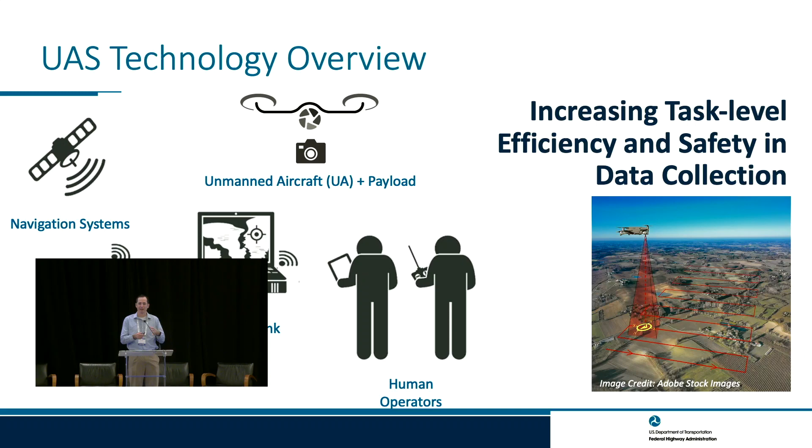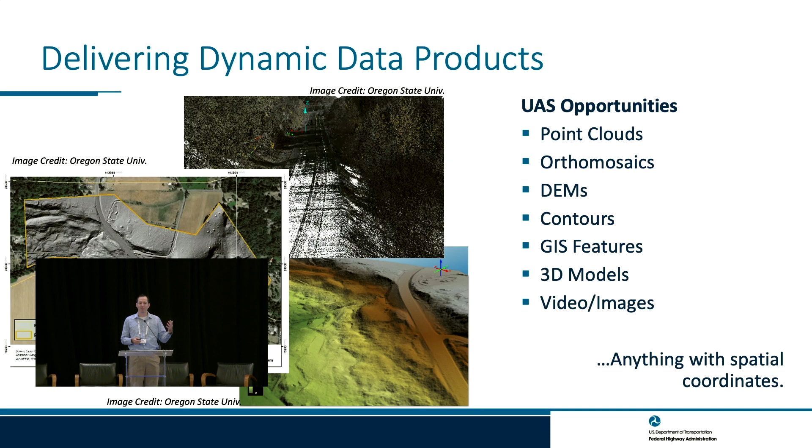This presentation will ramp up in complexity, but I want to set the foundational stuff on what we're looking at, which is the data products. There are a lot of data products. Most of the states have been out there talking about that yesterday, so I won't belabor it, but these are all the things we can do today. They're pretty straightforward, but a picture is worth 1,000 words. Let's show people what we're going to do, and there's a lot of buy-in when you can have these high-quality visuals.

Some of the other areas we're looking at are traditional inspections versus UAS inspections. There's kind of the assumption that the status quo is perfect, right? We always fight the status quo inertia. Everything that's out there, since it's what's being done, is somehow good, and anything different has to prove itself at a higher level than justifying the status quo, because the status quo is what we're doing, so it must be okay. But where are those areas we can start looking at?

Again, we're not replacing bridge inspectors, we'll never replace bridge inspectors. But how many states have enough bridge inspectors to handle all their inspections and make sure all their inspectors have spent the time on each bridge they're comfortable with for their inspection? Pretty sure we all want a little bit more efficiency. It's not like there are thousands of people beating down the doors of the DOT to go be bridge inspectors, the workforce is pretty tight in that space. So how can we make them more efficient and spend their time on those critical elements where we really need them to get their hands on and do the detailed analysis?

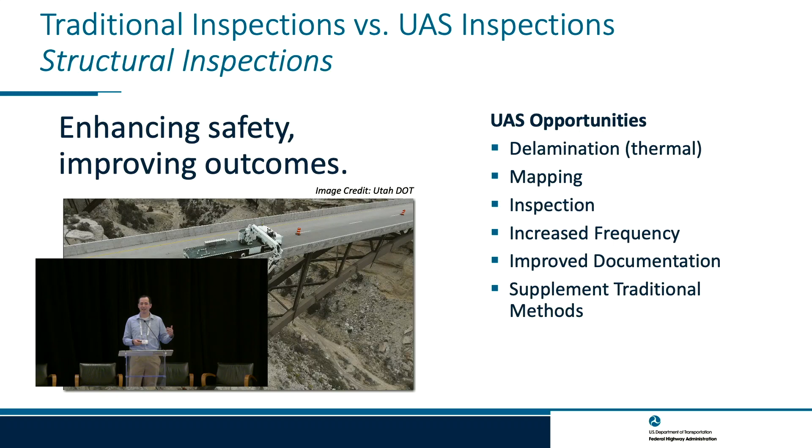Looking at construction inspection, a lot of construction inspection is routine visual inspection, simple documentation, the type of stuff UAS really excels at. Sure, you still have to have concrete technicians out there, you have to do asphalt testing, things like that. UAS is not going to replace that, but the things you just have to go look at and make sure the contractor has done, maybe progress quantities, maybe not final quantities, but progress quantities.

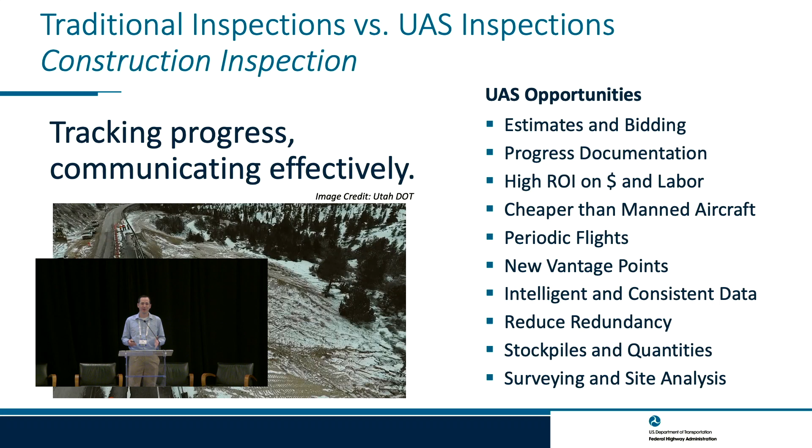Those are things where your inspection staff are burning up a lot of time. How many of you have inspectors who are fully engaged on every single project happening in the state? I'll say the answer is zero. Your inspectors are triaging where they need to be, trying to figure out the highest risk areas, and the rest they just can't get to. So this can really help your inspectors be more efficient.

Emergency response is another use case. The UAS is great for situational awareness, getting out to these high-risk areas where we know they're high risk because it's a declared emergency area. Why do we want to start putting people there just to try to get an idea?

But you can start planning your response, from a DOT perspective, looking at where the roads are washed out and getting rough quantities. Is it 100,000 cubic yards of material that came down on the road, or is it 10,000? We don't need to be super precise, but I need to start planning how long it's going to take to reopen the road, because people will ask how much equipment it will take, what's a rough order of magnitude cost, so we can start budgeting and getting a reasonable idea of what it'll take to come back from these emergencies.

Through Every Day Counts, we've identified 15 use cases. Probably readable in the back of the room depending on how good your eyes are, but these are 15 use cases we think are ready to go today. As you look through your UAS program, if you're doing some of these, these are others you might want to consider as use cases that feed on each other. If you get good at one, you can take those lessons learned and grow your program. These are ones Federal Highway can provide support on, so if you have questions, we can help get things up and running for you.

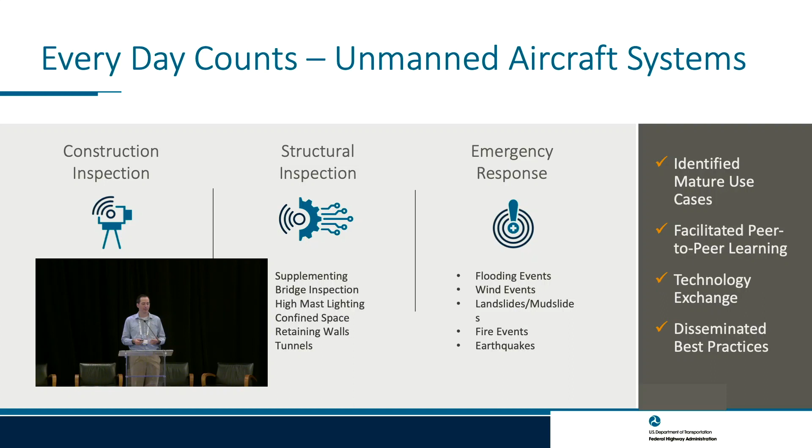So what have we done? In about the last 18 months is when most of those peer exchanges and workshops happened, so it's been a very busy 18 months. Just out of curiosity, how many were part of the almost 2,000 people who were at one of those events? Look at that, we're still getting more people. That shows there's a lot of turnover in this space. We're trying to get to everybody in every state, so we're going to keep going with this.

So this is my announcement that we're going to continue the peer exchanges starting next year, another round of them. We were listening to everybody talk yesterday, and we're going to try to find states with similar levels of programs and similar challenges, and see if we can get 5, 6, 7 states together and do several peer exchanges next year. So if you're interested, talk to me, we can make that happen.

It's our goal to continue this conversation for at least the next two years. I'm not going to try to do this level of engagement every year, but we're going to keep the conversation going.

Again, from what you all have told AASHTO, everybody has a UAS program in some stage of development. My hope is that we can continue to be of value to everybody, because we've heard every state DOT, Puerto Rico and DC as well, say that they want to use UAS. They're invested in moving it forward. So how can we do it with a national plan so we're not reinventing the wheel 52 times?

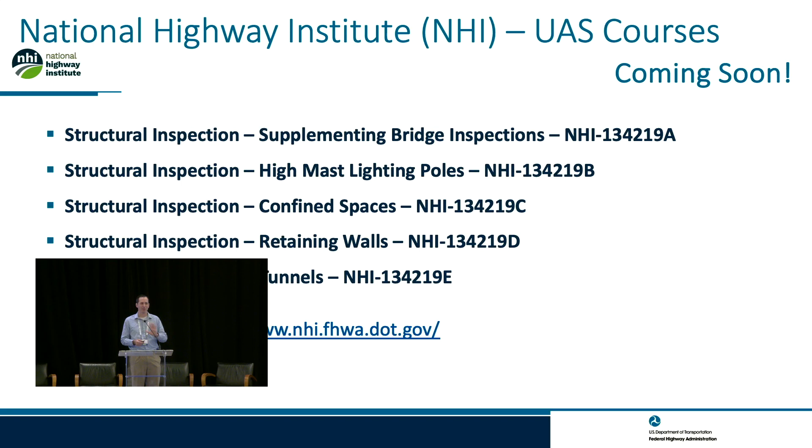Another interesting thing Federal Highway has done is we have that unique opportunity to look globally and see what other countries are doing, see what we can borrow. As we're looking to borrow from states here, we're also looking to other countries to see what they're doing, what their operations look like. Last year we went to the UK and to Germany and met with their UAS program at the federal level, state level, local level, academics, and private sector. We were busy, to say the least, moving around those countries to meet with everybody.

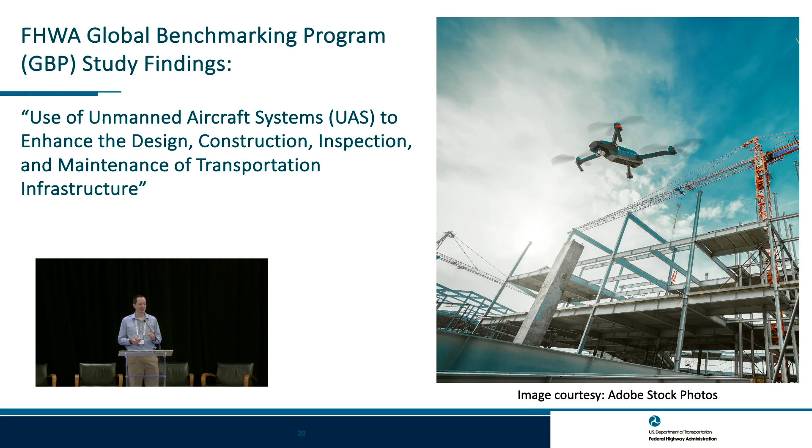So why did we go? Again, we have similar infrastructure around the world, similar responses - there's flooding, fire events, wind events. So what are those things that are common? What are those pain points that other countries have? Perhaps can we collaborate at an international level? So we're not just looking at resources in our country, we're looking more globally at resources to solve these same problems. To the software vendor point, if you get all 52 jurisdictions in the US wanting to solve a problem, that problem probably gets solved. If you get multiple countries wanting to solve the same problem, I'm pretty sure that problem gets solved that way too.

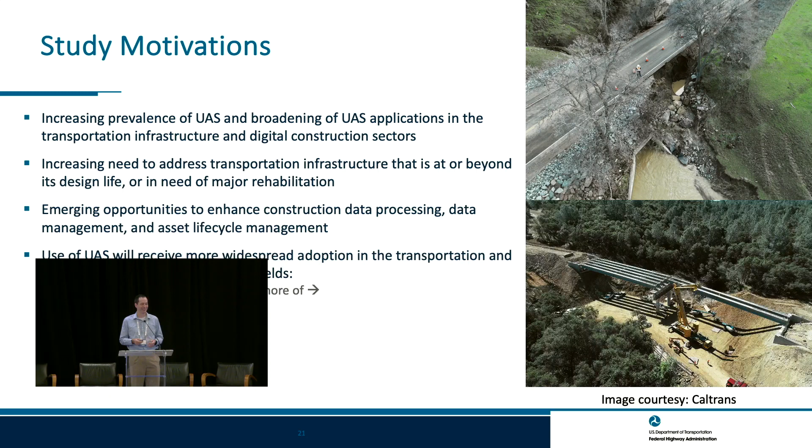So this is just a summary. Again, we were busy, but we also looked at multimodal, so the Port of Hamburg, to look at what other modes of transportation outside the highway sector are doing. Federal Highway is kind of more uniquely positioned to look at all those other modes of transportation, get those lessons learned, figure out where people are having problems or where they've pushed the envelope, and what we can learn. So there's a lot of findings here, and I'll get into these in a little bit more detail.

The findings are that everybody kind of has the same issues and is seeing the same benefits. Confined space inspection is one where I think there's a lot of value, but perhaps the platforms aren't as good as advertised yet, though they're getting there. The safety regulations around confined space inspections make those really expensive to do, whereas if you can do it with a drone with confidence that you're actually getting a good inspection, there's potential for high value there. So we saw a lot of confined space inspection.

Data management was another one. Everybody's struggling with data management. That's a global issue, right? We're not alone, you're not alone, the U.S. is not alone. Everybody's struggling because the ability to generate data is so inexpensive now that everybody's flooding their IT systems with data, everybody's flooding the cloud with data. There's data centers being built everywhere to handle the data that's just being mass produced now.

Looking at machine learning and AI, not as a buzzword but as an actual thing that can help us. Everybody's like, oh, we'll let AI solve this problem for us. It doesn't, until you give it really good training data and spend hours validating it. And I don't want to do that. No state in the US really wants to sit there. If anybody has done machine learning in detail, there's no way some poor undergrad is going to sit there their entire life marking up and annotating pictures.

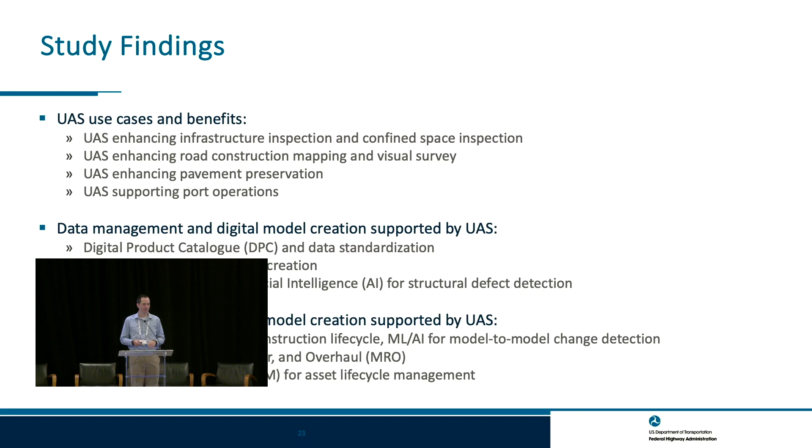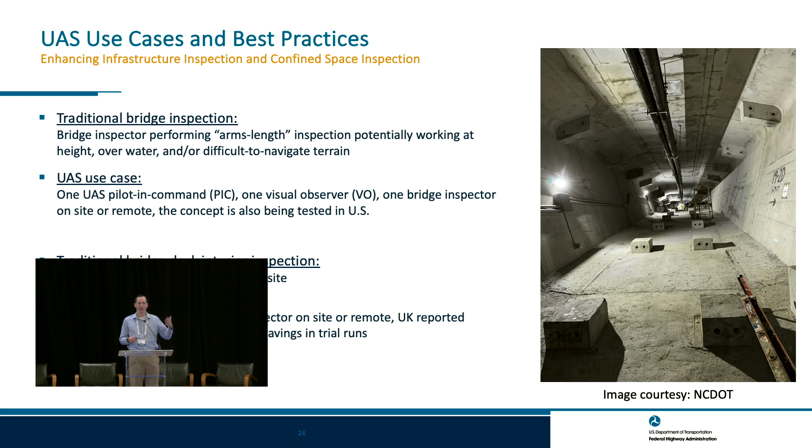suspect there's defects or we don't have good imagery to validate. So yeah, I covered a bunch of the inspection here. The UK, on their confined space inspection within bridges, found about a 50% time saving, and again, they're still in the testing phase. They expect that to get better as they continue to have better performing platforms, better work processing, and kind of plan in the future to put LED lights within some of the confined spaces you're going to inspect on a regular basis, rather than trying to figure out 20 years from now how we're going to light this thing. We've thought through how we're going to inspect things at the design point, or at some maintenance or rehabilitation point.

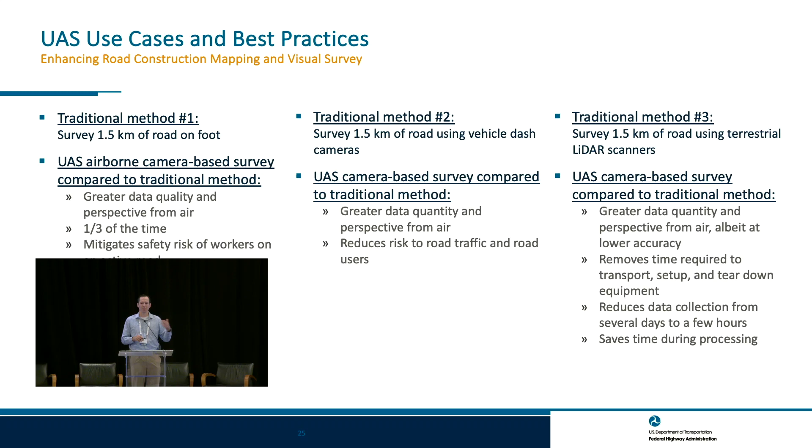Looking through surveying, I thought it was kind of interesting that ground control points are just becoming part of the construction process within the UK. Especially in their high-speed rail areas, all of the bridges already have targets on them, so they don't worry about going and setting a bunch of ground control points. They'll validate it occasionally, but they understand they're just going to have ground control points built into their infrastructure, so they can always tie back and don't have to spend all this time going back and setting ground control points for areas they know they're going to inspect regularly.

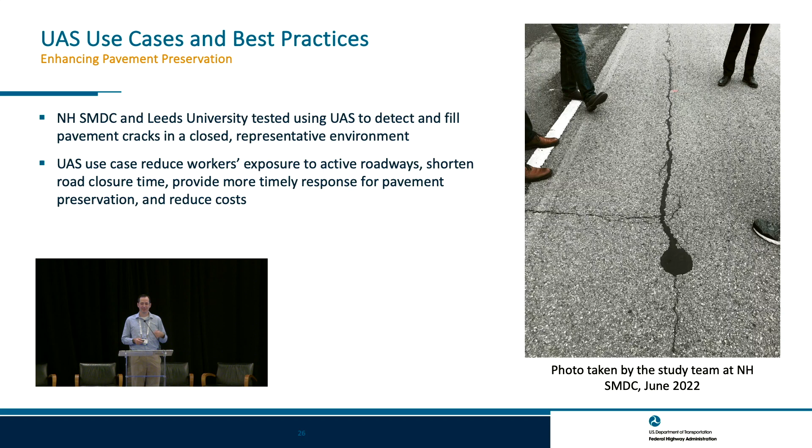Interesting technology - I put it in here just because I think one day this is the super future, right? Where it's crack sealing - it's detecting the crack and sealing the crack all from a drone. So it's a drone that has a crack sealing capability right on it. The theory is, in the future, have a drone swarm that goes out at night and seals all the cracks when there's no traffic, then just flies back and recharges and reloads during the day. And it worked in theory with one drone. Now the swarm technology and the ability to do this on some of our really bad pavements isn't there yet, but again, it's starting to get outside the box of our asset management plans.

So the Port of Hamburg was very interesting because of the German regulations. If anybody complains about the FAA—and I've got the FAA covered here because they're coming up next—go to Germany and try to fly a UAS. I promise you'll come back and say, oh man, the FAA is the best.

But the Port of Hamburg said, well, the economic imperative makes sense that we can waive some of this and start doing remote operations. So they started looking at the big gantry cranes that are unloading their ships. Taking those out of service to do a detailed inspection on the gantry crane is a huge economic impact. It's a controlled space anyway, so let's go fly a drone there autonomously.

Collect the information of the gantry crane while it's working—look for bolts, rust, hydraulic leakage, all that stuff—and then we can look at the imagery and video later. But we're never taking these gantry cranes out of service unless we see a reason to. We're not taking it out of service for routine inspections. I think there's a chance some of the lessons they're learning with those remote gantry crane operations are something we can build on for remote critical infrastructure inspections here in the US.

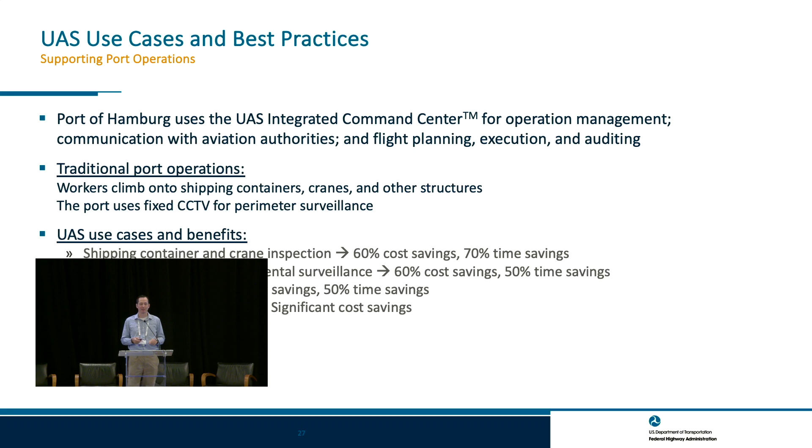The other part is getting into data. How do you manage all the data? How do you collect the data? You're collecting these huge volumes of data. The UK has taken that and said, okay, about 80% of what we do, we just apply our design standards, with an engineer sitting there applying design standards.

We're creating these detailed sets of plans for a 1.5 mill and overlay job, and we're not really changing anything—everything is within our design standards. This is a perfect opportunity to let AI apply the design standard because we have this high quality, wide breadth of data collected through the UAS.

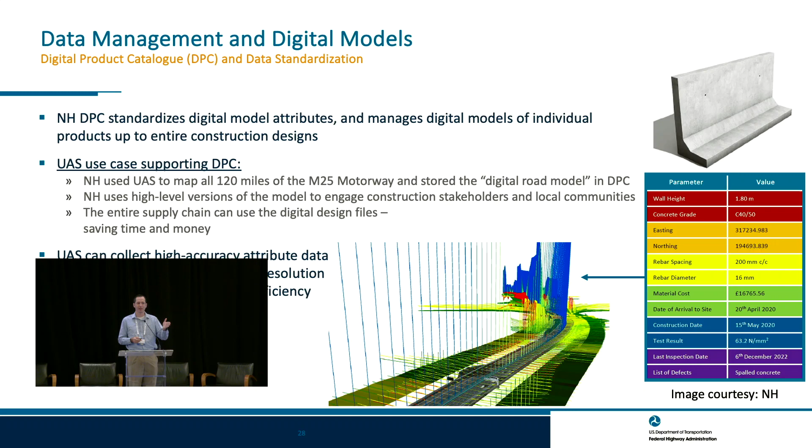So it's working. The red areas are where the AI says your engineers need to go deal with this because the design standard can't fit. The green areas are where it has confidence the design standards were applied. So the UAS lets you collect wide enough data where you're not looking at line work where it's hard to understand what's happening outside the survey points.

And this is again getting into just setting ground control and having it permanently be a part of it. Like they have a major crack in the bridge—let's just set ground control there, and then we can fly it and not go out and try to set ground control every single time.

So it's something to learn. If you're going to come back to a site time and time again, just set the ground control the first time, something that's going to be a little more durable, where you can just get back to it and not have to keep resetting it.

And that's also for tracking crack spread and things of that nature. There are other ground control points that are not on something that's moving, so they can tie those in and see if that crack is moving and they need to get in there immediately, or it's stable and they can just let that bridge be.

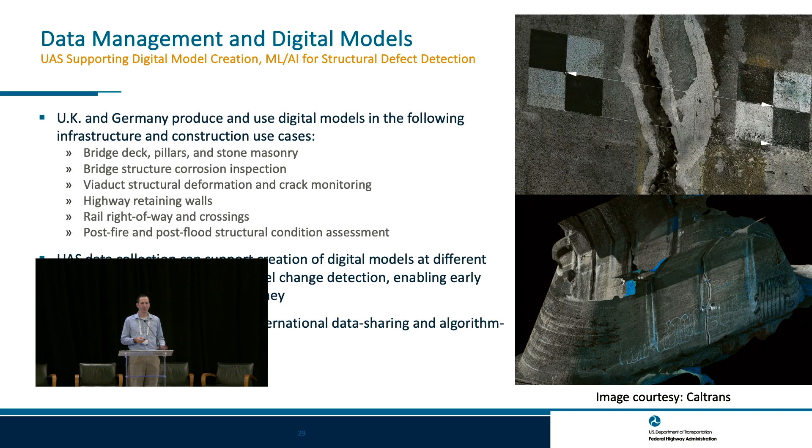Something that's interesting—we're actually putting an NCHRP proposal together. So if this interests you, talk to me. Aaron, is Aaron in the room? Is Thomas in the room? Is Zeke in the room? There's Zeke, I got one of the people who were with me in the room. Talk to one of us.

What they've done in Germany is looked at—okay, we don't really have good maintenance plans for UAS. We just kind of look at it and say it looks all right, the battery's more or less holding the charge like we think it should, let's go fly. I'm assuming that's probably what most people's maintenance plans look like. Some might be more advanced, but we're trying to look at how we can standardize a maintenance plan.

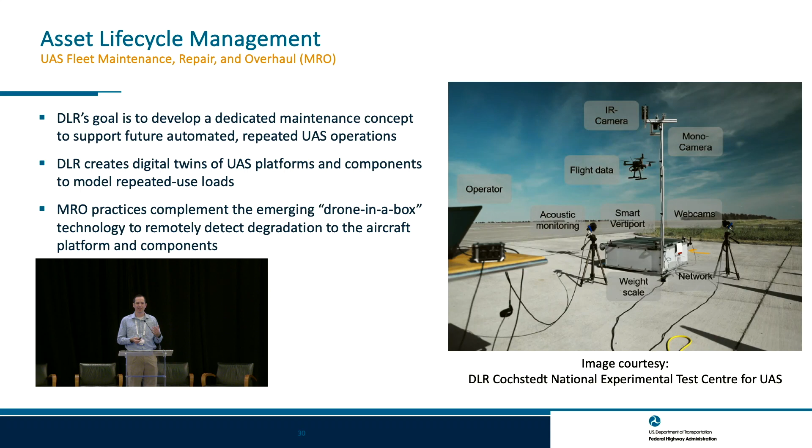This is overkill because this was like the German equivalent of NASA. So they set up all these sensors, creating a profile for the platform. What they found is that it sounds different when you start to have micro cracks in your propellers, imperceptible to the human ear, but the computer can tell the pitch is different. So if you have a microphone, you power up your UAS, and the computer can tell you right away there's cracks in your propellers you can't see yet, because it makes a different pitch when you start it up. So how do we create things like that so we can have more proven safety cases?

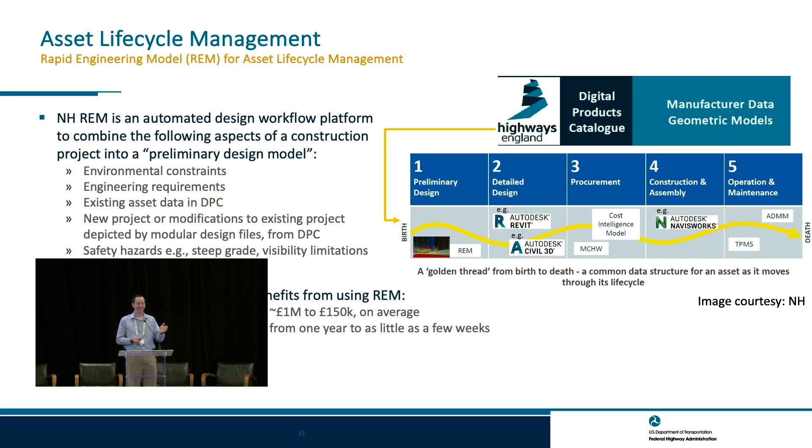This gets into more of the automated data management and design work. I'm not going to spend a lot of time here, but just to let people know, at almost every workshop and peer exchange we did in the last 18 months, we started with UAS, and by the end of day 2, we were all talking data management. I think that's where we ended up yesterday too. Internationally, same thing - we spent all week talking UAS, and the last day we spent the whole day talking data management and how we're going to handle this.

So we're looking at taking these lessons, bringing them back domestically, looking at an NCHRP proposal to develop common maintenance standards, because there are already NCHRP projects in the works to put training plans together and organizational structure. Those projects are in the works, not published yet. But there's nothing on maintenance of the platforms themselves, so it could be a good opportunity if you're interested in being on the panel and reviewing it to make sure it makes sense. I don't like publications that don't make sense to practical users.

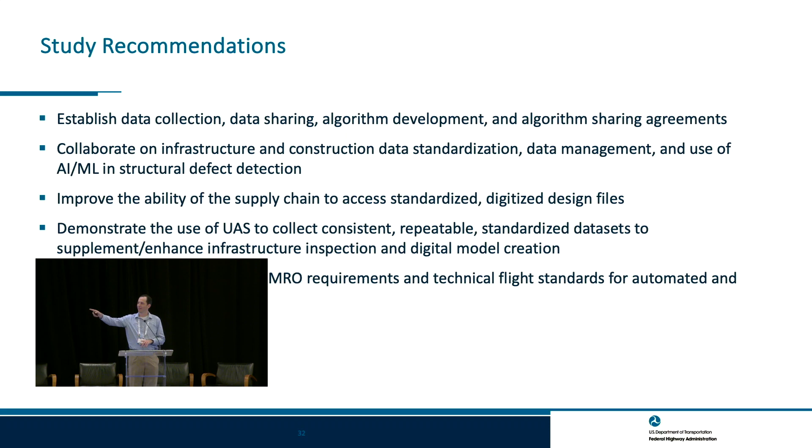Again, talk to me, and Zeke's over there. He's right there. You can talk to him too.

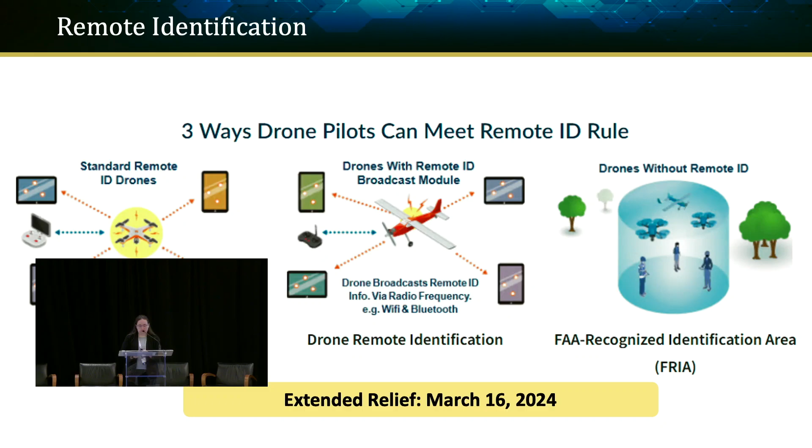I just wanted to end by saying my background is in community planning, so all of this has been really fun to learn and go back to the GIS type things. And y'all are doing amazing things with UAS that I at the FAA didn't know, so it's really awesome, and I only hope to work with you more going forward. So if you have questions, if you have policy that just doesn't make sense because it can be confusing, reach out, we're here to help. So that's everything I have.

I think I have time for questions. Yeah, so if anyone has one, let me know. No, I couldn't hear that.

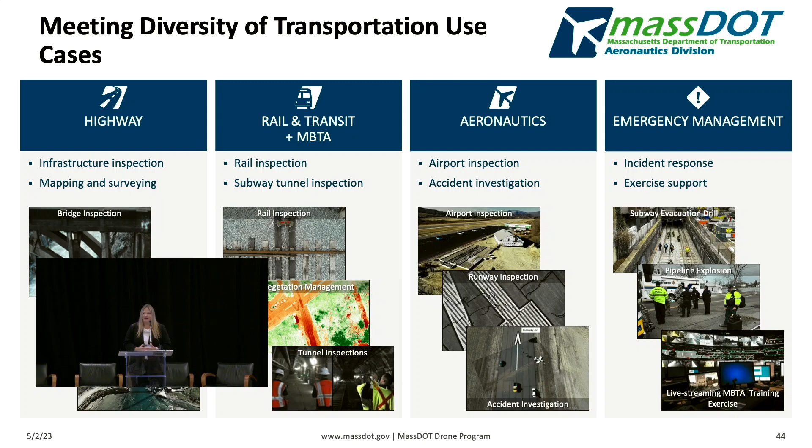I already mentioned some of the use cases. Today I'm really going to concentrate more on some of the rotary studies we've done, and maybe mention a little bit about the intersection studies.

I see Transoft is in the room. They were part of an intersection study we did with the MassDOT safety section, so good to see you. And I realize I'm using the word rotary. I think to the rest of the world, roundabout should be the right word, just so we're all speaking the right language.

We have done a lot of data collection around rotary or roundabout studies, with the safety section, MassDOT Highway Safety, as well as the Office of Transportation and Planning. I'm going to talk about just a few specific use cases that we did.

So the first is Albert J. Brown Circle. This is in Revere, Massachusetts, and it is a doozy. I didn't know too much about it, but you can see there's not a lot of lines, not a lot of organization that goes into this rotary. What's happened is they've had not only a lot of traffic incidents, but also a lot of truck rollovers. And I think the straw that broke the camel's back — if you look in the top left quadrant, there's a salt marsh there, and it's a really vital salt marsh. There was a truck rollover, there was hazardous material, and it infiltrated the salt marsh.

So the Executive Office of Environmental Affairs Secretariat called the Secretary of Transportation and said, could you please do something about this rotary? They wanted to make some really good decisions about it, so they asked us if we could fly, and that would be one of the data components they would use to try to make good decisions on what they could do to enhance the safety around this rotary.

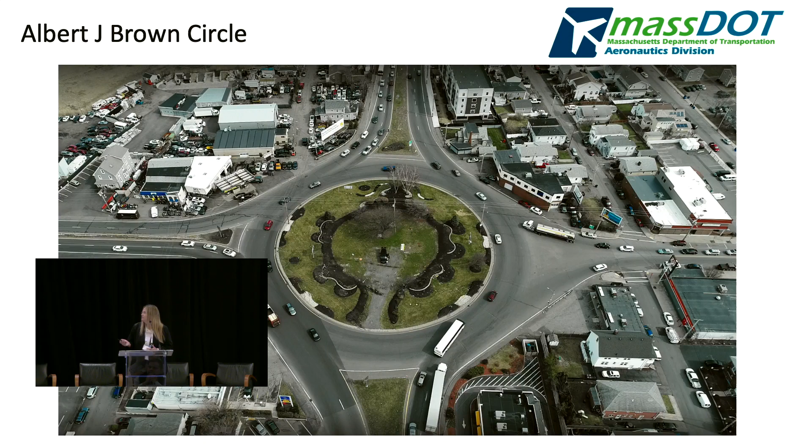So it's funny, once I found out about this rotary, I started to see all the incidents on social media, so that was kind of an interesting time for me. And the one you can see there on the right, the next time we went to do our flights, because we did this over a series of a few weeks, that rotary sign was actually down on the ground, one car took it out. So it's a very interesting predicament here.

All right, so once they asked us to do these flights, it always figures that the worst traffic locations are closest to Logan. So most of the Boston area is under Class B airspace. We have somebody that does airspace authorizations and they spend a lot of their time doing that. We have over 40 to 50 authorizations running at any given time. This one was extra fun because it's less than a mile from runway 22 at Logan. So obviously getting out ahead of that and starting the airspace authorization as soon as anybody even uttered this word was really important.

The second issue was, well, if we go out and collect all this data, and even James alluded to it, how are you going to analyze all this? What is it all going to mean? So we brought that up to Highway Safety.

They actually found this company called DataFromSky, and they do a lot of AI machine learning around traffic modeling. You can see this is directly from their website, and they're able to give certain information about what's happening in the rotary. I am not advocating for one company or another, I will just say the instructions they put on their website were great. It was like, this is the field of view you need, this is the resolution you need, and it was like clockwork. We didn't really even need to ask any more questions, they provided all that information.

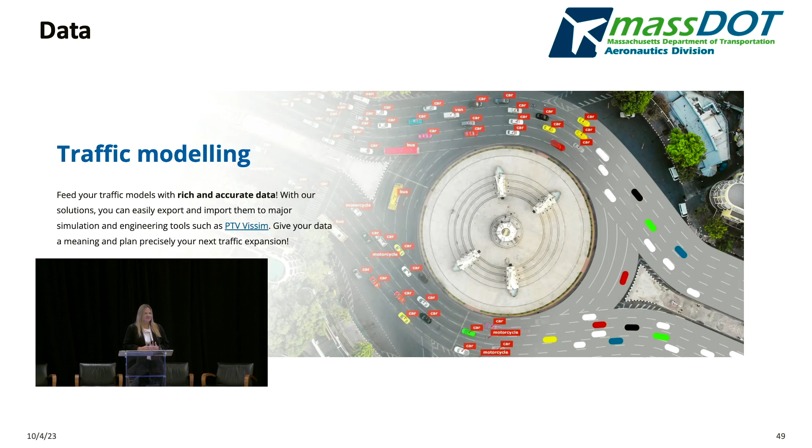So there were a lot of lessons learned for us to go out and collect this much data. I think a lot of us in the UAS community were like, yes, we're going to go out and use 4K and produce the most beautiful video ever. But if you go out and fly it in 4K, you're going to have a large amount of data. So figuring out the very minimum resolution we needed for DataFromSky to do what they needed to do was really important.

The other thing was that they wanted continuous data. In order to do that, as we all know, most batteries only last 30 to 40 minutes, and they wanted 2 hours of continuous data. They asked us if we could put the tether up. We have a tether, I have a lot of PTSD from that tether. There's probably better products on the market today, I don't know what they are, but if anybody wants to know what not to use, come see me afterwards. So we really didn't want to use the tether, especially in a large population space like this.

Luckily, we couldn't get the field of view we needed with the tether, so we were trying to come up with different ideas. We thought about putting up one drone as the other one's coming down, and after working with Highway, they said, you know what, we'll take the 2 minutes it takes for you all to change the battery and put it back up. So that ended up being the solution. There's some limitations with it, they didn't get the continuous data they wanted, but it is what it is at this point.

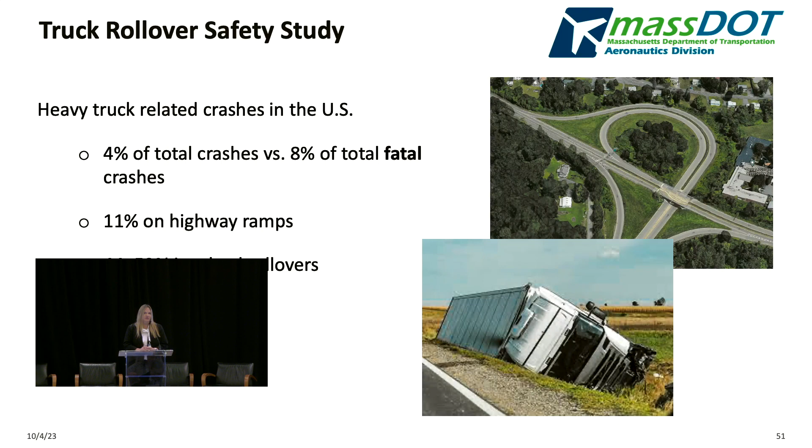So they looked at a lot of different data to determine why trucks were rolling over on these ramps, and they wanted to have some really good data on that so they can make better decisions on what the mitigation would be in the future.

Enter us. We went out and we collected, again, hours and hours of data. They asked again if we could use the tether. The field of view was not correct with the tether, so we did the up and down technique.

Again, this was just one of the data pieces to understand what some of the characteristics were of the trucks that were entering some of these off-ramps.

The ultimate study included some of the characteristics that they were able to get from our footage. They also used historical data, sensors on trucks, and ground sensors to come to these conclusions.

Probably not a big surprise, a lot of it was attributable to speeding, but again, they wanted to be able to get that data to support that. A lot of it was due to unknown reasons—I'm not sure why that was. But knowing that, our safety section could go out and make better recommendations on how to mitigate some of these incidents on our off-ramps on the Mass Pike.

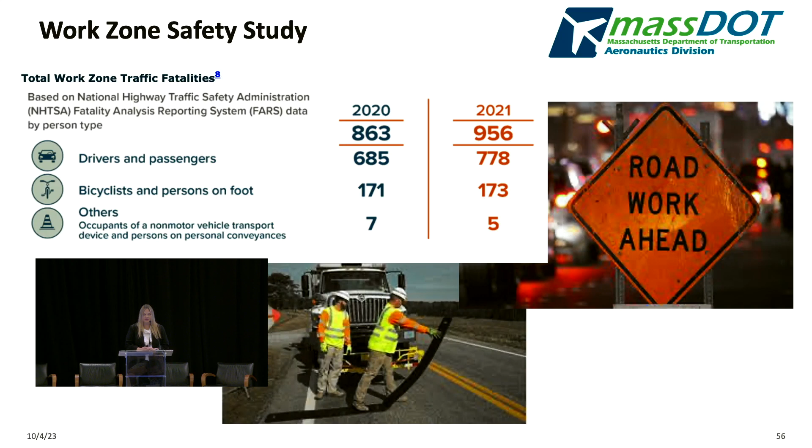So these are some of the pictures that we took from here. This is something we collected just a few weeks ago, so I don't have any data results from this yet, but just wanted to show how drones could go out and help collect data around using different configurations around work zones, looking at some of the rumble strips to see what is causing drivers to slow down a little bit more around the work zones. Hopefully UMass Transportation Center will have these results shortly.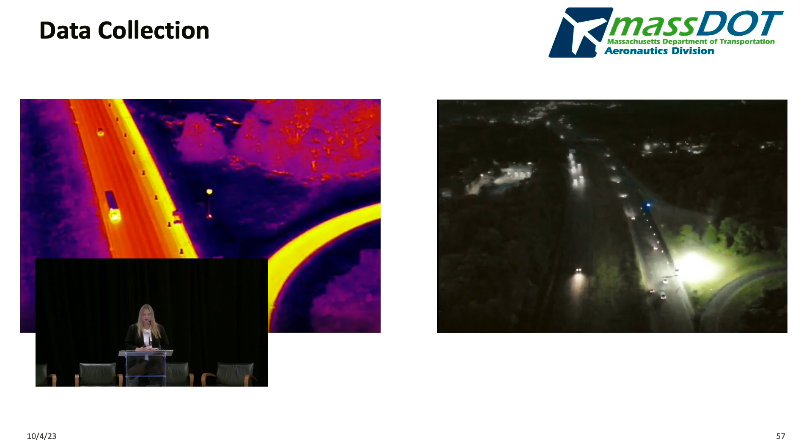We really wanted to try to make some of this public, and that's when legal got involved and reminded us you have to be very careful what you say. So there's nothing publicized yet, but I think it's the beginning of a workflow, working with the proper authorities to eventually get some of this out to the public when we think about public engagement and how we're making things safer around everybody's communities.

And then I thought I'd end on a good note. I saw one of them out here. If anybody's familiar with HAWK signals, they started installing them in Massachusetts, and it's a way to help manage crosswalks and how people cross. I'll show you the video. They came to us and said it'd be really great if we could use a drone to do that, so we could get this out to the public and give them a different viewpoint, and hopefully people would start to use these in a safe manner. Anytime you change any of the traffic configurations, it's always a little bit anarchic. So I just wanted to end with this video.

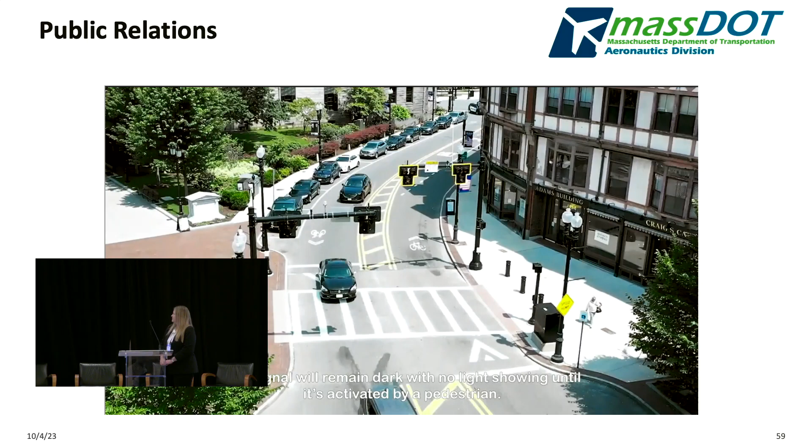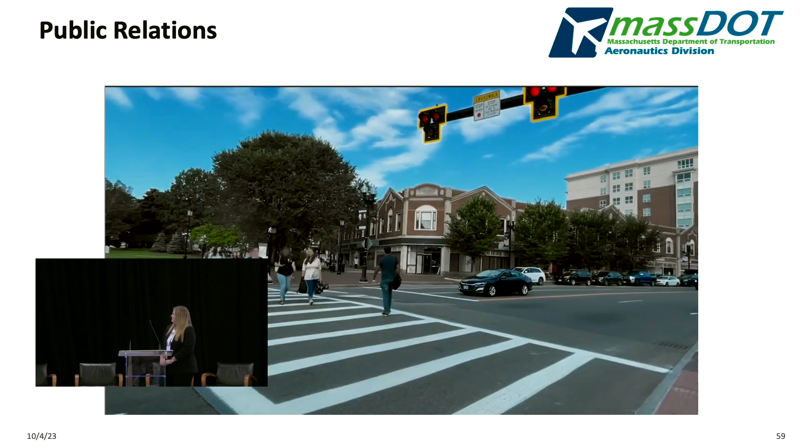You may have seen some of these pedestrian-activated signals popping up around Massachusetts. These are called pedestrian hybrid beacons, or PHBs. They are designed to provide safe crossing for pedestrians in high-traffic areas. Here are some simple steps to remember when encountering this signal. The pedestrian hybrid beacon consists of three lights: a yellow light at the bottom and two red lights at the top. The signal will remain dark with no light showing until it's activated by a pedestrian. When the signal is dark, drivers can proceed through the crossing as usual. Pedestrians can activate the signal by pressing the crosswalk button. Once activated, drivers will see a flashing yellow light. Drivers can still proceed through the crossing but should use caution as a pedestrian is waiting to cross. The signal then turns solid yellow, alerting drivers to prepare to stop. The yellow light is followed by solid red lights. Drivers in both directions must come to a complete stop, giving pedestrians the opportunity to cross. Pedestrians should only cross when the walk signal comes on. The signal then turns to flashing red. Drivers are still required to stop to allow pedestrians to finish crossing, but may proceed with caution once the crosswalk is clear. We all play an important part in keeping each other safe on the road. Thank you for being safe by staying informed, and remember to always scan the street for wheels and feet.

All right, and because I know the FAA is in the room, we did not fly over any traffic. We worked with the Quincy Police Department on any shots that were over the road. All right, any questions? Yes.

That's a good question. Highway does have a traffic operations center. We weren't live streaming anything, so we just contained everything we were bringing in. But that is a good question. We have tried to work with our Highway Operations Center, thinking about if we had a major incident on a roadway—let's say there was a truck rollover with hazardous cargo. There are traffic cameras around, of course, but let's say there were areas where there's always a knock-on effect if something's going on with the highway. So if there was some sort of knock-on effect, could we maybe use drones to understand some of the knock-on effects where maybe there weren't traffic cameras? So we have explored that use case. Is that what you mean? Sure.

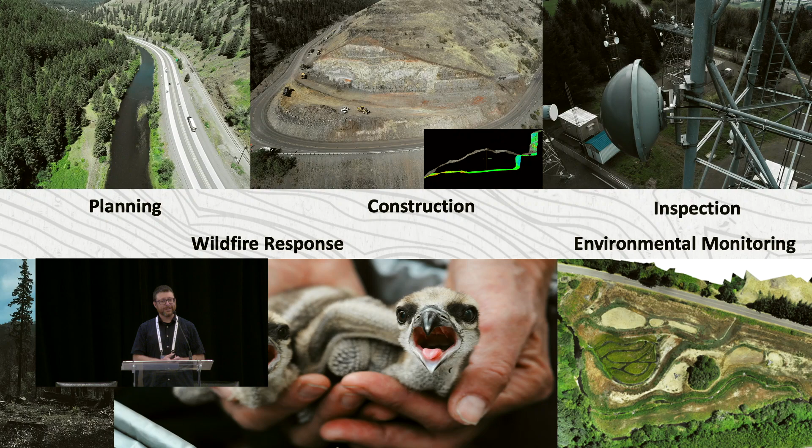And then my baby also.

So on top of the UAS program, we've also spun up a project visualization group, and this is one of my favorite things that we do. If you don't know Kurt Stiles from MassDOT and you're interested in this space, reach out to him, I can get you in contact. He's mentored us through the EDC program side by side with the UAS program, which was a great pairing. So we take the UAS data and create amazing reality meshes that bring context to folks.

We built this roundabout out in a rural community in Central Oregon. People don't like change out there, they've had it the same way forever, so they want to see what this looks like now for my business, for the community, for people accessing the campsites or going to the pizza shop. With that reality mesh and the 3D design placed on top, we can put them in first-person views, animate the different movements and scenarios. We can sit on your porch and show you what your view looks like after the project's built. It's been a phenomenal tool for us, catching like wildfire all across our agency.

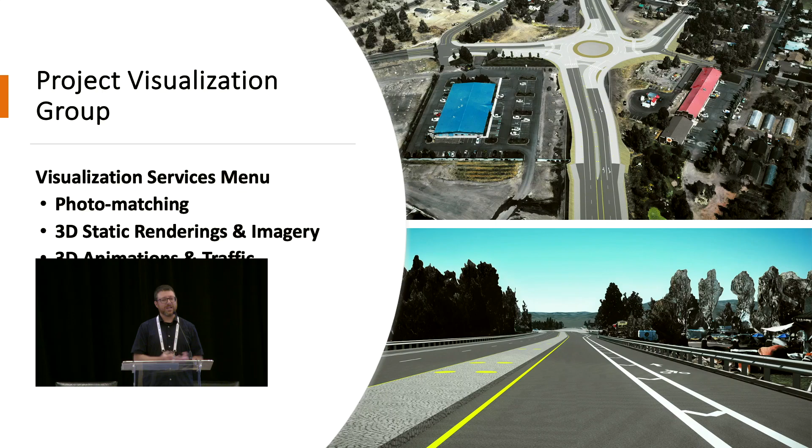So finally, what's next for us?

Evaluating the scope and scale of our program. Like I said, we grew a little bit too fast. I have pilots that only do currency flights, so I've started to put in annual currency requirements. If you're not flying, you're suspended until I'm ready to retrain you, and you have to tell me why you want back in the program. I spent my time and our budget to train you up and bring you into this program, I don't want to waste it. I have plenty of people that want to be an active participant, so if you're not willing to participate and do your part, you don't get to be a part of this. This is not something you get to do just because.

We continually evaluate what's right for us, the right number of pilots, and the right number of use cases, checking that out. We're obviously following regulations. On ongoing training and flight skills, I'd love to see more engagement with advanced flight skills. We're not into structure inspection yet, that's the most difficult, most technical use case. A lot of the flying we're doing is pretty standard stuff. We make incredible things with it, but how do we look towards the future and build up more than just basic training, get some more advanced flight skills and get folks involved with that?